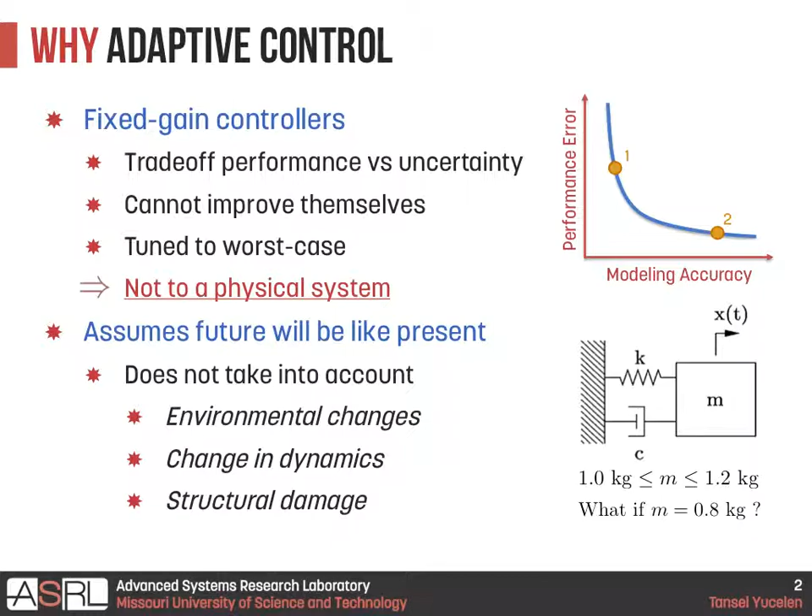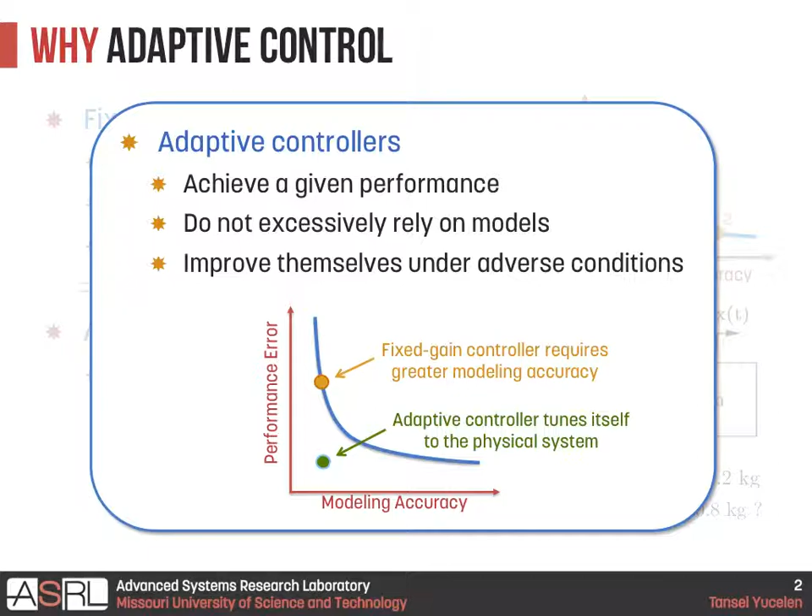So I already talked about this slide, just back up a little bit. So why adaptive control? Because we compared adaptive control with robust controllers or fixed gain controllers, and since they are tuned to a worst case, not to a physical system, and since they cannot improve themselves, we highlighted the advantages of using adaptive controllers. And for example, I have a new example here. Let's say we have a spring mass damper system. For robust control, we are assuming that, let's say, mass is between 1 and 1.2 kilograms. But what happens if really mass is 0.8 kilograms? So we need adaptive control to adapt to this condition. And it is evident after so many talks today that we need adaptive controllers since they tune themselves to the physical system to achieve some desired properties.

Now, here is the design challenge. Worst case performance bounds in adaptive control depend on the uncertainty. So if you talk about verification and validation of adaptive controllers, you need to meaningfully talk about your worst case bounds. But in the derivations that I showed before, Travis showed, Naira showed, and so on, these worst case L infinity bounds depend on the uncertainty. So if you would like to know these bounds, you need to know a conservative upper bound on the uncertainty. Otherwise, if you don't know the uncertainty, you cannot compute those bounds.

And another design challenge: control engineers cannot assign a priori bounds without knowing the uncertainty during a design. For example, I am employing an adaptive control, and I would like to assign my error bound, that my error will not exceed some epsilon. And I would like to give that epsilon at the beginning of the design, so that I can be confident that my adaptive control always behaves within this bound and never exceeds it. And if we cannot do that, especially for modular systems, this design issue can lead to a modular system failure.

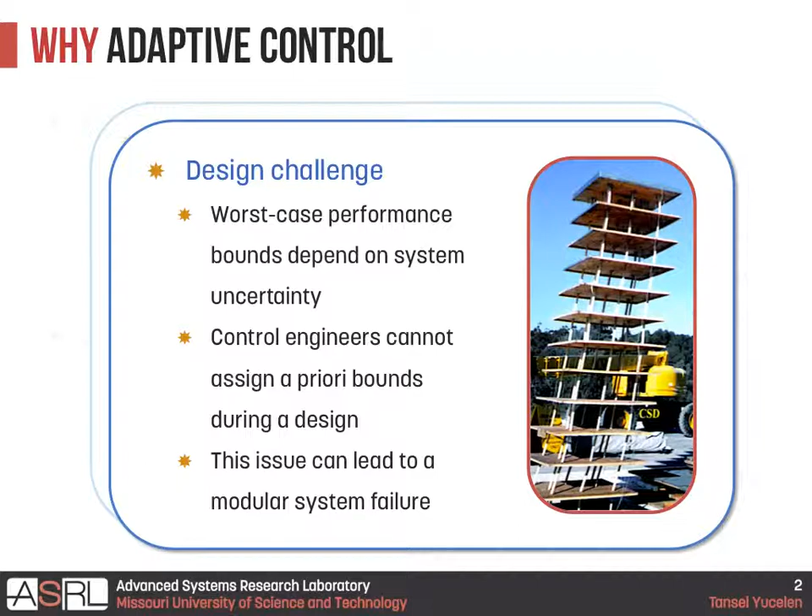For example, let's look at this tall building in San Diego. Let's say we have local adaptive controllers in each local system, and let's say this goes to the right by 1 foot, this goes 1 foot, 1 foot, 1 foot, then this fails. So I would like to assign that the entire system will not go left or right in any direction by more than epsilon, and I would like to assign that epsilon during the design. So it is a challenge. Now, this was the adaptive control challenge.

Now, let me also review the literature a little bit on distributed adaptation, and all these references are included on your flash drives. So the traditional approaches consider this figure A. So I have a local subsystem. This thick line is the hard connection, like springs and dampers, to the other system. And these thin lines are the software, virtual connections between subsystem and the controller. So traditional approaches assume that every controller communicates with its local subsystem and they don't communicate with others. So since no communication is allowed, no asymptotic stability result can be achieved.

More recent approaches consider control exchange. For example, let's say I have a lot of local subsystems. They don't communicate with each other, but every local controller accesses the desired trajectories of all others. This is proposed by Narendra, and this is okay, but of course, there is a cost of communication, and really the question is, does every local controller need to communicate with others all the time? Probably not. I only need to communicate with my neighbors modeled on a graph, which is the contribution of this presentation.

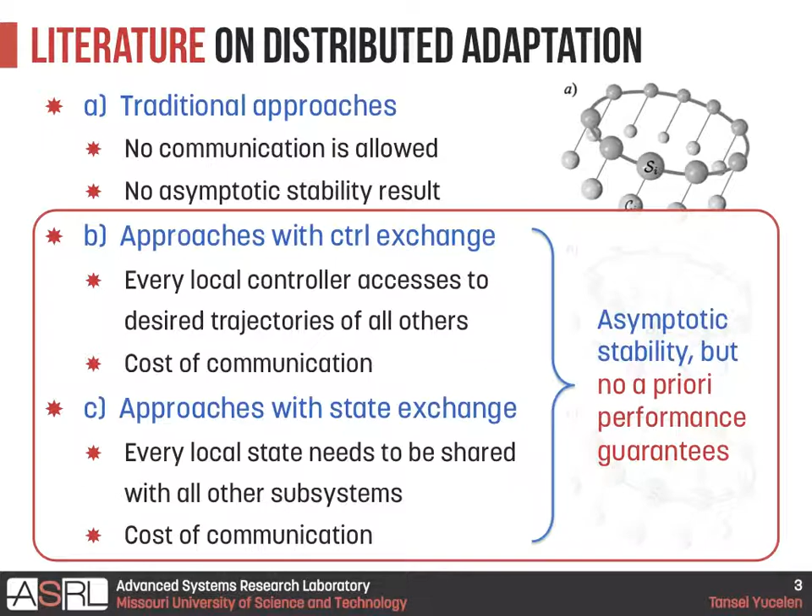Now, here is the more mathematical modular systems formulation. A modular system consists of n uncertain heterogeneous, not identical, submodules defined on a graph, think for example a spacecraft, such that the physical interactions between submodules are unknown. So let's say this is the local subsystem. We are introducing these i subscripts because we have n subsystems. A_i x_i is known to that local subsystem. B_i u_i is the control of that local subsystem, and this is the uncertainty coming from my neighbors, and this is my individual uncertainty of that system. This is through the hard interconnections.

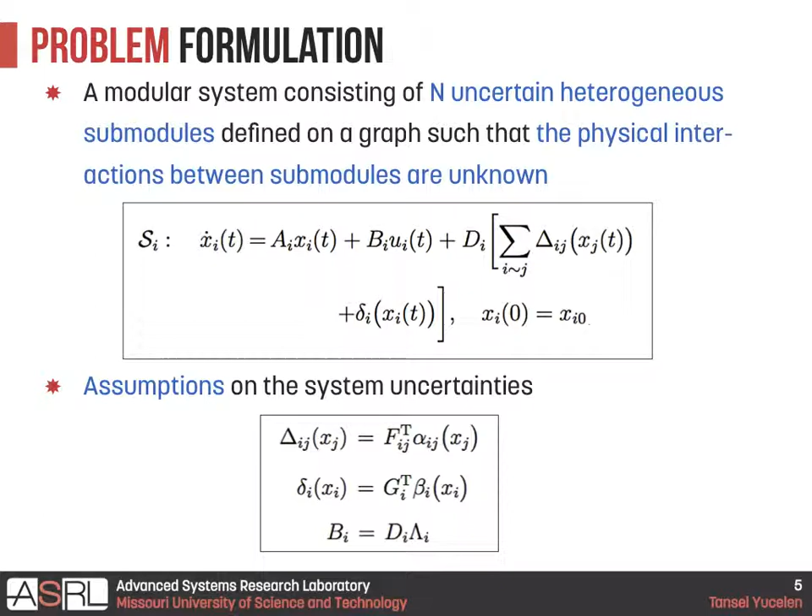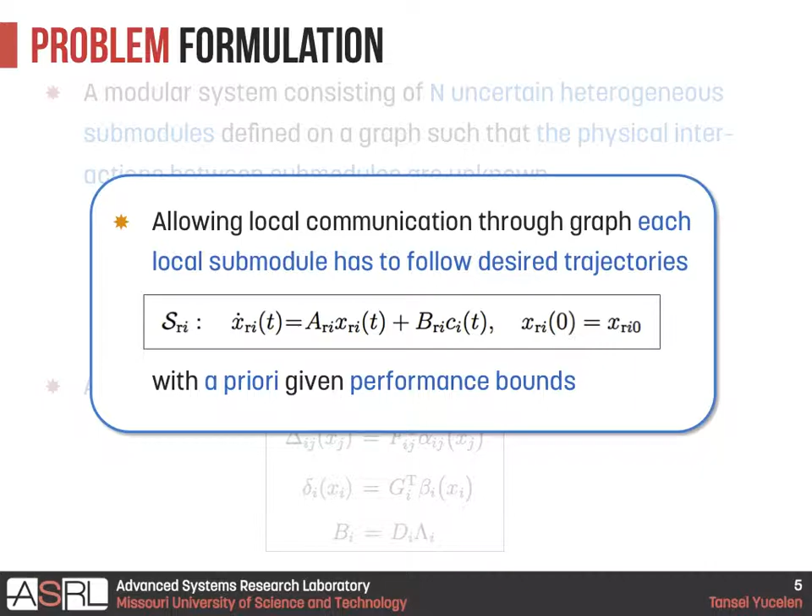And the three assumptions are standard, basically saying there exists a parameterization of the uncertainty and there exist known basis functions. So here is the problem, allowing local, not global. I don't need to exchange my information with all of you, just with my neighbors. So the problem is allowing local communication through a graph. Each local submodule has to follow desired trajectories captured by these heterogeneous reference models of each individual subsystem with a priori assigned prescribed performance bounds. This first part contributes to large-scale systems, and the second part contributes to adaptive control. And we have standard matching conditions on each heterogeneous local subsystem.

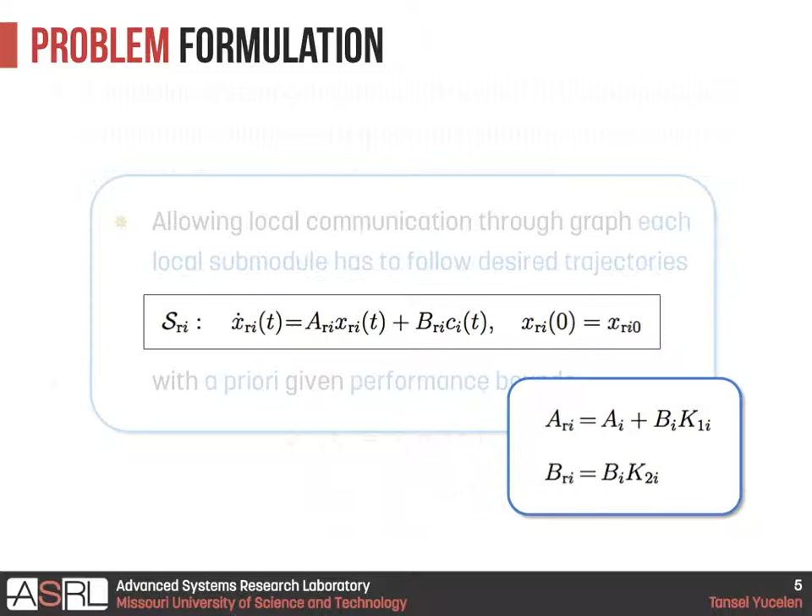Now, here is the distributed adaptive control. Here we are grouping the uncertain terms with the local controller, and I am denoting this to be u tilde. U tilde is a large function. Here I am assuming that there is no nominal controller; of course, you can consider an augmenting scheme. So everything here is unknown, but u_i is known. This is your local control signal. These terms look really ugly, but I can define W_i transpose multiplied by sigma to be all these uncertainties, where W_i is a giant unknown matrix, and sigma is a basis function composed of my state, my local neighbor state, and the command that is applied to my local subsystem only.

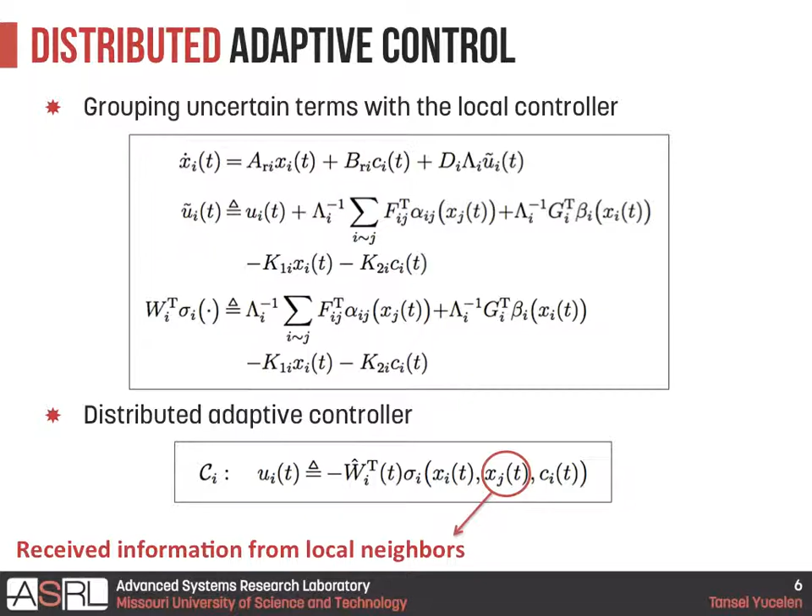Well, here we are revisiting the traditional adaptive control application of this modular system. EI dot equals A RI EI minus this uncertain term. So instead of choosing one Lyapunov function here, if you choose n Lyapunov functions for n subsystems, then you can have V dot upper bounded by minus EI transpose RI EI, which is kind of an expected result. And hence, by using Barbalat's lemma, the error goes to 0, the difference between each system and each reference model, if we use this weight update law.

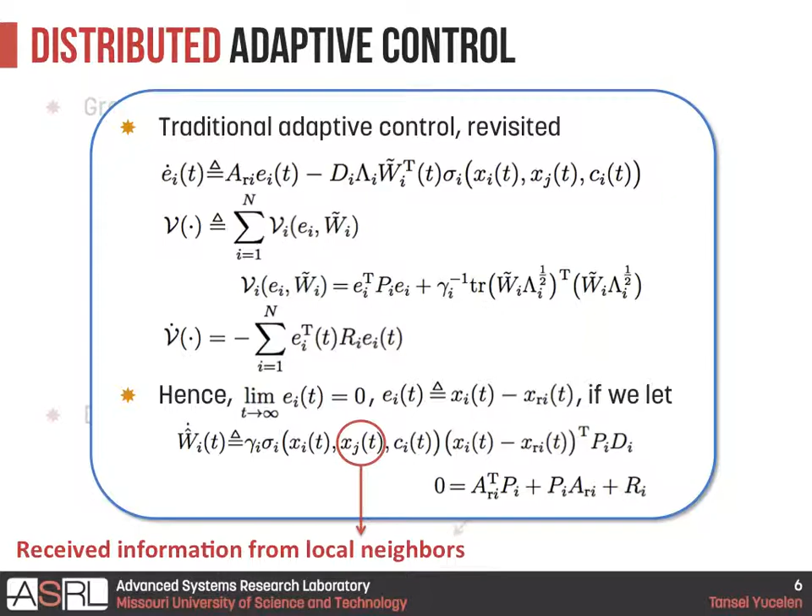So here, this result shows that by allowing local communications, basically without requiring global communications like the other papers, we can achieve asymptotic stability on the error. So that's the first contribution of this paper, which contributes to modular systems, not to adaptive control, because adaptive control-wise, we are just using standard traditional adaptive control to solve a problem. So up to this point, it is an interesting application of adaptive control to modular systems by allowing local subsystem communications. Now, before talking about the adaptive control contribution, let's talk about this.

So for single systems, we discussed that achieving performance is important, but for modular systems, it is absolutely important, because every deviation from a desired performance in each local subsystem can propagate through the entire system. Then it can destabilize the entire system. So during the transient, we need to have guaranteed bounds. Let's say, for discussion, the initial error mismatch is 0.

So the traditional setup forces us to use high gain all the time if we would like to achieve strict performance guarantees, which means it uses the available system bandwidth all the time, which is not desired. Otherwise, you may not need to resort to high gain. But if you are interested in computing this very conservative L infinity bound, you need to know this uncertainty. So either you compute it or you need to use high gain if you are interested in achieving very strict guarantees on the performance.

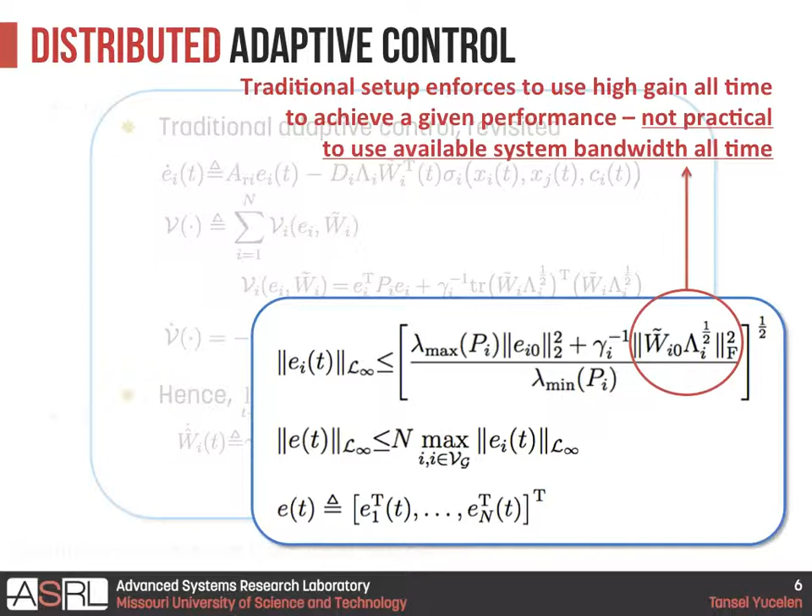Now, of course, this can cause oscillations, but you can employ, for example, low frequency learning or closed-loop reference models, and so on. But my point is, you still need to know W to compute these worst case bounds. Now, instead of using high gain all the time, we would like to use high gain only when it is absolutely necessary. So for this, I am going to introduce a new set-theoretic adaptive control approach. Basically, you will see that it will be a state-dependent rate adjustment approach for the learning rate, such that we can achieve a priori known system performance.

So let me introduce restricted potential functions, phi. Here, Z is an H norm, which is defined like this. So basically, this Z is defined on an interval between 0 and epsilon, where epsilon is not included. So the H norm of Z belongs to a set from 0 to epsilon. And you will see that this epsilon will be your design parameter eventually. I'm going to talk about it in a second. But this phi satisfies 5 properties. And these are not assumptions on the system, these are your design assumptions. So you need to choose a phi that satisfies all these 5 conditions.

So the first condition is if the H norm of z is 0, then phi is 0. This is straightforward. The second one is if z in H norm is in this epsilon domain, and z is not 0, then phi, your restricted potential function, needs to be positive. And by the way, it is a scalar function. And if z is approaching epsilon, then phi approaches infinity. And phi is continuously differentiable on that domain. Outside that domain, I don't care.

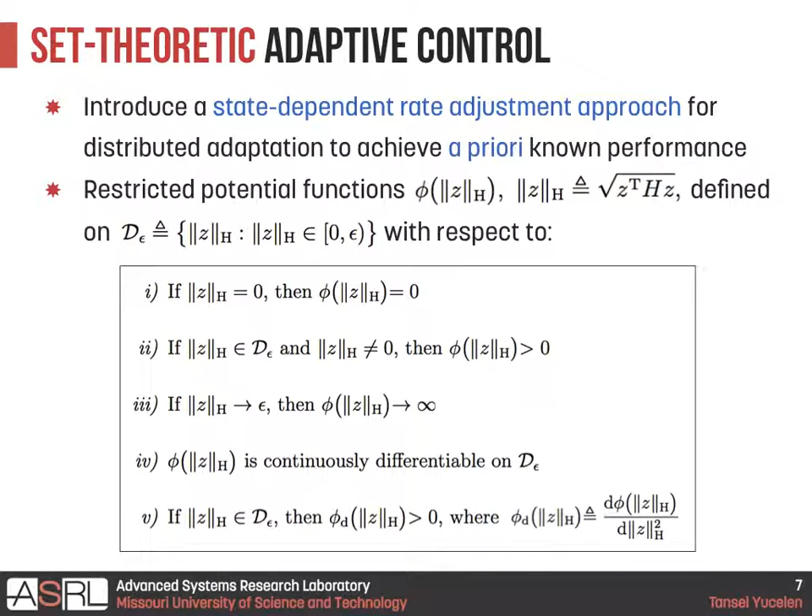So now, stability with explicit performance guarantees. I am going to consider this restricted Lyapunov function. Here is the restricted potential function plus the conventional term for the weight estimation error. And here, I am defining this Lyapunov function not in the entire domain. I am defining it on D of epsilon i, which you design by choosing this epsilon, multiplied by the r-dimensional w tilde, and it is positive definite.

And basically, using this derivative, which you can write like that, you can have V dot of i equal to the derivative of this restricted potential function, which is a positive quantity, multiplied by ei transpose Ri ei, if and only if you choose this weight update law. Now, this weight update law looks like a standard weight update law. So you can apply all the modifications or approaches that we discussed today to get rid of oscillations and so on and so forth.

But the novelty is that it has this derivative of the restricted potential function, such that you can even get rid of this gamma i, set it to 1, and see how the algorithm works. Basically, it will tune the algorithm in such a way that the system trajectories always stay in this compact and invariant set. And ei goes to 0 as t goes to infinity follows from the LaSalle-Yoshizawa theorem or Barbalat's lemma.

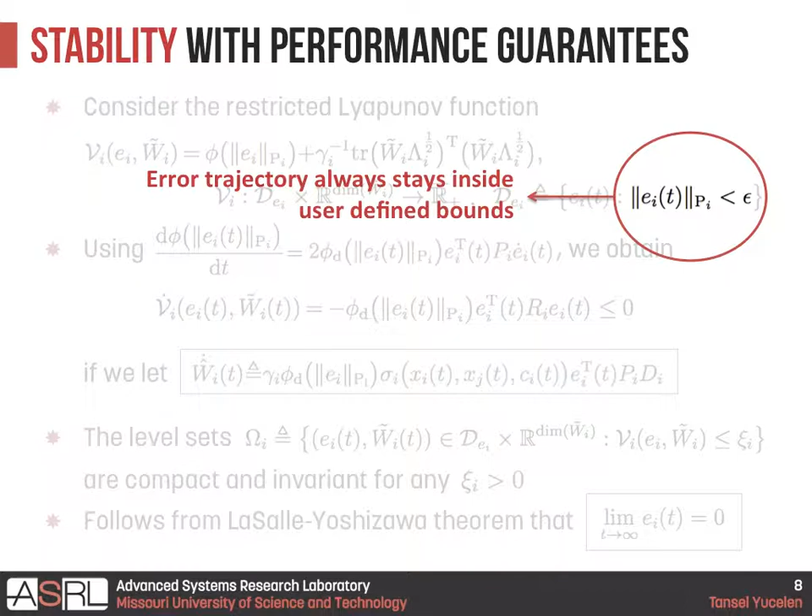Now, the error trajectory always stays inside user-defined bounds, because I choose my Lyapunov function like that on this D domain, such that I need to come up with epsilon, and then my error trajectory will stay within that epsilon. This is a design parameter, not an analysis parameter. And the proposed setup may enforce high gain, because if you look at this function, if the error is large, then you may need to resort to high gain.

But in contrast to standard adaptive control, it uses high gain only when it is absolutely necessary. For example, let's say you are at a critical angle of attack and you don't know how to control the system, then adaptive control enforces high gain to come back to the original aircraft settings. So it uses high gain only when it is absolutely necessary. And of course, using high gain all the time is not desired.

Now, I am considering this example. Basically, we have 8 coupled inverted pendulums, connected with each other by dampers and springs. These are non-identical springs and dampers, and they are unknown. And the torque generated by each pendulum motor is subject to uncertain and heterogeneous control effectiveness. So I don't know how well my inverted pendulum motors generate those torques. So everything about this system is uncertain, plus I don't have a nominal controller.

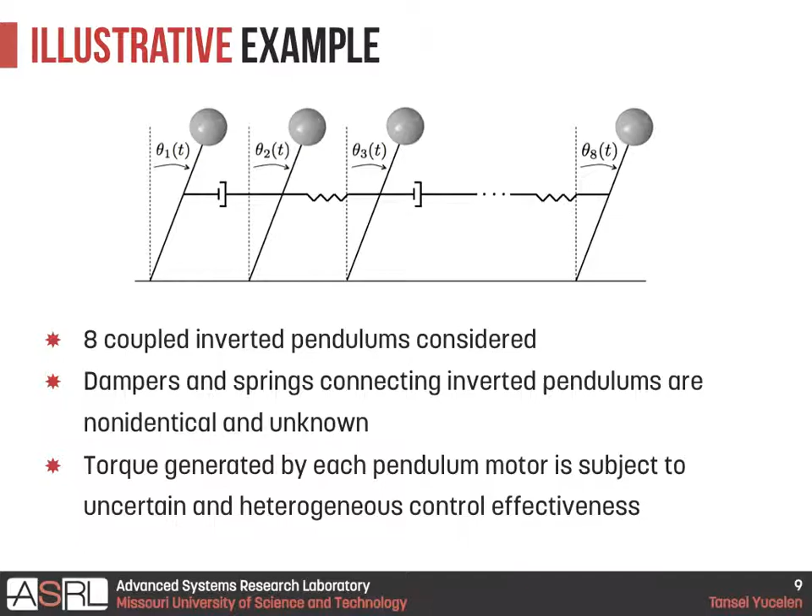So this satisfies the matching conditions that we discussed, and I'm going to turn on the adaptive controller to see what happens. So here is the illustrative example. I am only going to plot the angles of these inverted pendulums with the reference model pendulums. This dashed line is the reference model trajectory of each pendulum, and I chose them to be the same because it is easier to construct that plot. You can certainly choose 8 different reference models for each pendulum, but then this plot would be hard to explain. That's the only reason I chose the same.

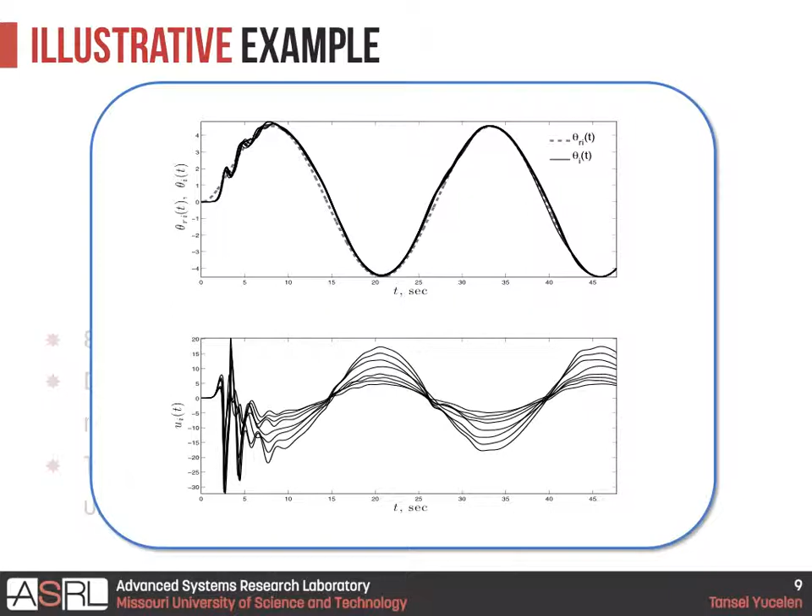And the code is on your flash drives, and feel free to play with the code. Basically, it tracks well, and this is the control signal. We have a little bit of oscillation here because this paper is not about transient performance. You can certainly employ low frequency learning or closed loop reference models, and so on, to improve transients. This is not the scope of this presentation, but the scope is this: every inverted pendulum trajectory stays within epsilon equals 1.

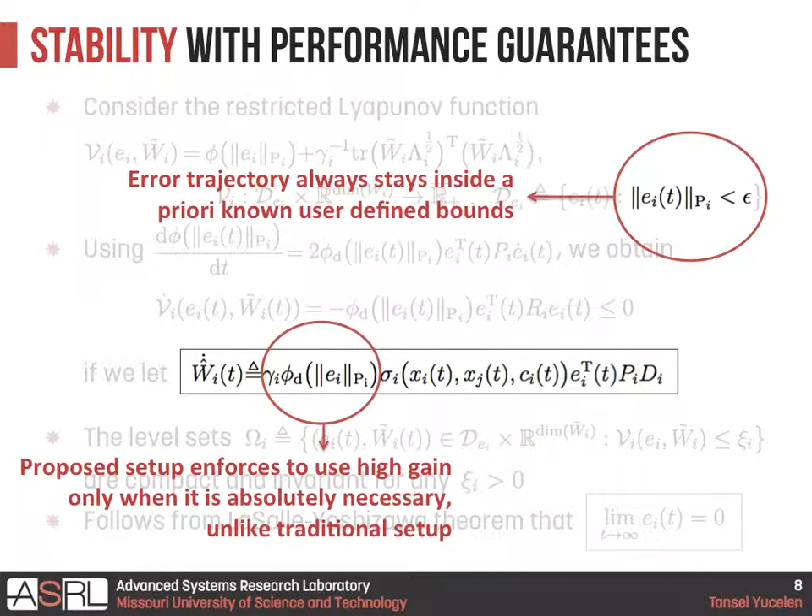Errors never exceed 1 because this is the design that I am for. So here, at the beginning of the design, I choose this epsilon to be 1 on that restricted potential function that you see here, and instead of z, basically I used e, error. And basically it stays between prescribed bounds, and error converges to 0 asymptotically. So one Lyapunov function and 2 objectives: not only stability but also worst case, a priori known, user-assigned worst case bounds that do not depend on the uncertainty in the system.

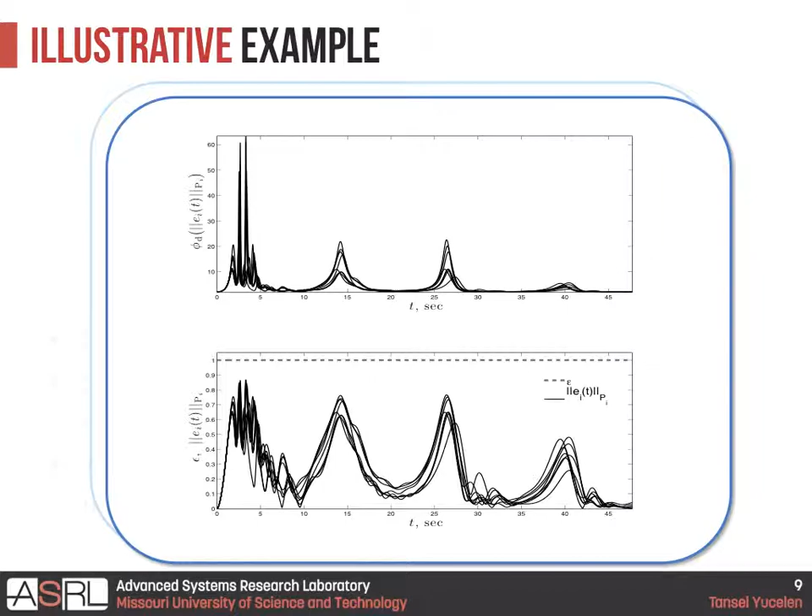And here is how the effective learning rate, the adaptation gain, behaves. Here the system trajectory is approaching this epsilon, then the adaptation gain becomes large, which is kind of expected. But for the rest, the adaptation gain is extremely small because we don't need to use adaptive control around these regions. So the algorithm decides what adaptation gain to use to achieve some prescribed bound. And so that's how it works.

So basically, concluding remarks are, this has 2 contributions. The first contribution is to modular systems: how to achieve asymptotic stability via not global communications, but local communications that are only graph-theoretically modeled. And the contribution to adaptive control is uncertainty-independent performance bounds determined by control engineers, which is important from the verification and validation point of view.

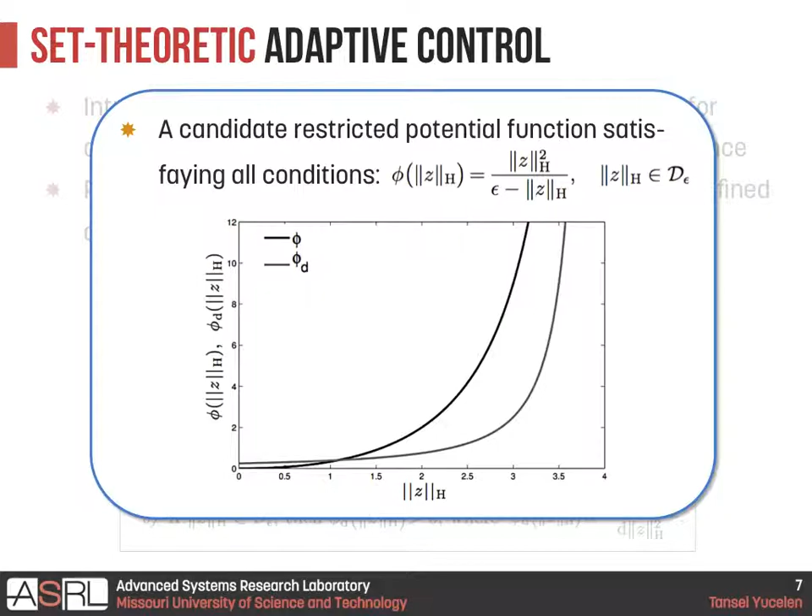And ongoing research, first I will read this. If bounds on the user-defined functions are extremely tight, and there exists a significant amount of measurement noise in states, then adaptation gains, yes, become very large. And in this case, you need to use smoothing functions, or you need to limit. For example, if your software limit on the high adaptation gain is 1000, then this should not go to infinity, but should be limited at 1000. In this case, you can talk about, of course, approximate enforcement of this constraint on the error dynamics. Which actually I suggest doing if you would like very tight bounds and have an excessive amount of measurement noise.

And another approach is to limit frequency content to achieve robustness. In this case, if you have measurement noise, then you need to use low frequency, for example, so that your adaptive control will not see that high frequency or unmodeled dynamics and so on and so forth, so that you can confidently use that algorithm.

The second extension is incorporating state constraints with control constraints, which is kind of a harder problem, which actually we are trying to address. This talks about error, or in some sense, state constraints, because if you limit error, then it eventually limits the states. So how you can do both simultaneously. And also consideration of communication dropouts, event triggers, or time delays in the communication between submodules. And here is my collaborator from Georgia Tech, Jeff Shamma, and I would like to take your questions.

I have a question. Sure. It's related to the state and control constraints. Right? So in all the presentations that we've heard today, no one really talked about those constraints. So control constraints? Yeah. That's right. And so do all the proofs and all the theory fall apart when you have that? For control constraints, I personally like using a method introduced at Georgia Tech by Eric Johnson and Anthony Calise, so-called pseudo-control hedging. And in fact, it is indeed included in your flash drives. So it is an important problem.